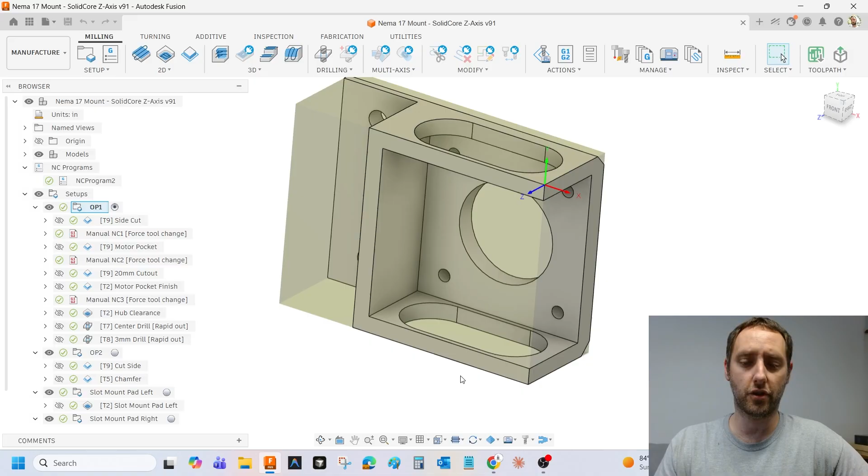Alright guys, today we are going to edit a Fusion 360 post processor for a Haas EC400 mill. We're going to use Claude AI to do the editing. If you haven't used Claude, just Google search Claude AI and sign in, sign up.

Okay, so before we get started, make sure you back up a copy of your post processor just in case. Make sure you test the code and just be cautious because we are editing your post processor and bad things can happen. So we're going to go to Google and search for Fusion 360 post processor training guide PDF.

Okay, now this first step is optional. You don't really have to do it, but I highly recommend it. What we're going to do is download the post processor training guide. So I open it up, it's a PDF. Make sure you search post processor training guide PDF. So open the PDF and hit download. Okay, so I'm going to download it.

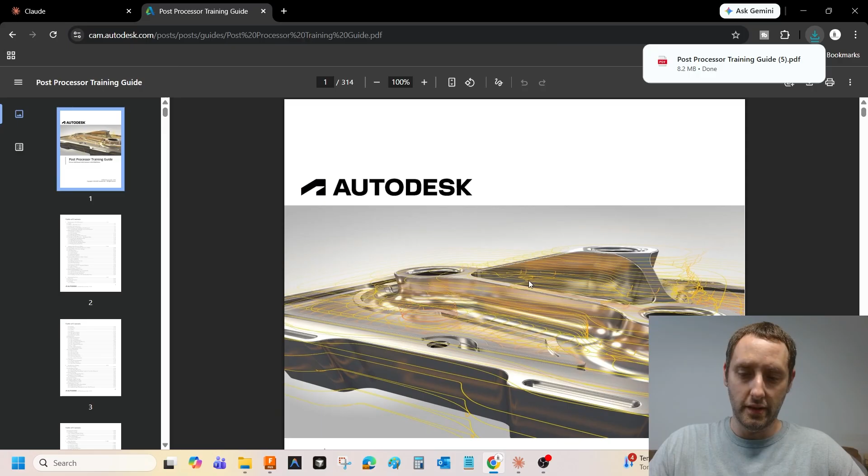Now what I'm going to do is go to Claude and hit this plus sign right here. I'm going to add the post processor training guide, and I'm going to add a copy of my post. Alright, so I'm going to go to add file. We're going to go to wherever you have your file, your post processor. If you don't know where to get your post processor, I'm going to show you.

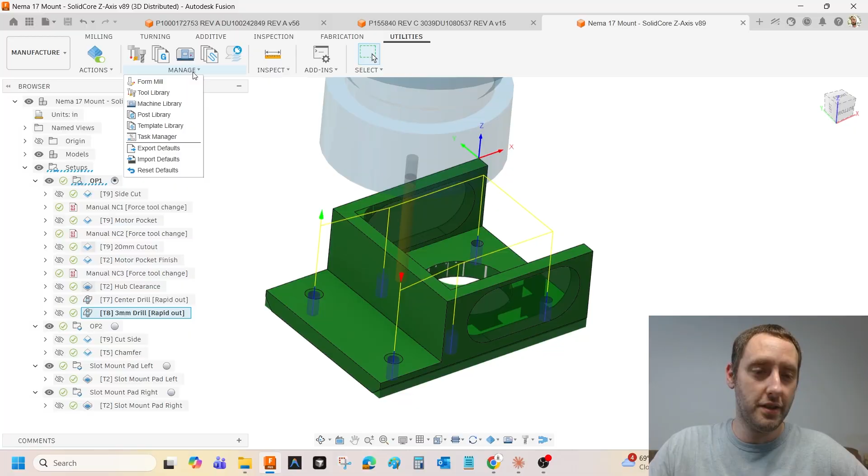I'm going to go to manage post library, then find the post processor. In this case, it's the Haas EC400. I'm going to right click, go to export, and save it in a location that I can find.

So now I'm going to go back to Claude. I'm going to hit the plus sign, then add the file. Let me hit open. So I added two files: the post processor training guide and the horizontal mill post.

Now what's going to happen is I'm going to prompt Claude. I'm going to tell it what we're doing, give it an intro: hey, we're going to edit this post, I need your help. Here's the post processor training guide, use this as reference, and here's my post processor. And then we're going to start listing things one by one that we're going to edit.

So the next thing you want to do is figure out what changes you want to make. Find a file that has some of the most common toolpaths you usually use. Doesn't have to be all of them. This is kind of simple right here, but it's enough to get us started.

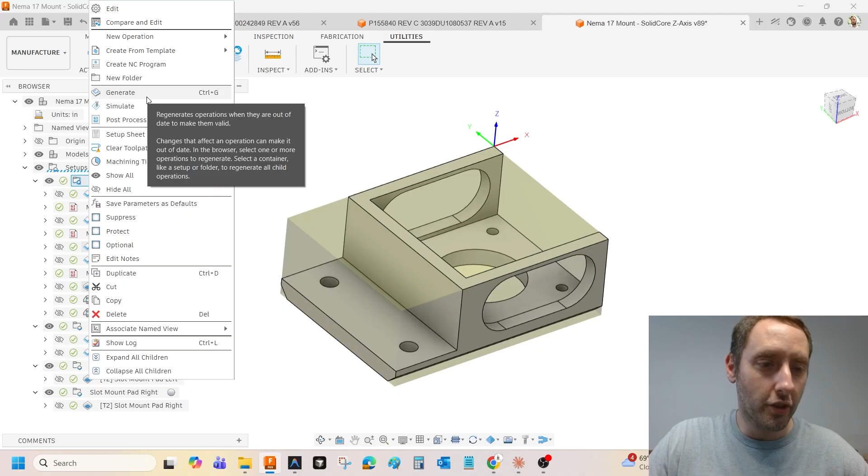So I'm going to go to post process, and I'm going to use the post that I just added. And let's go through here. So if you go through this, the first thing I want to do on this post processor is take out the using G00 travels along a dogleg path.

Alright, so I'm going to tell Claude, edit my post processor. First, let's start off with removing the using G00 which travels along dogleg. Alright, so I'm going to hit upload or send.

Okay, so Claude is reading. It says, I'll start by reading the skill for editing Fusion 360 post processor, then locate and remove the comment. Okay, so I told Claude, edit my post processor, first start with removing the G00 which travels along a dogleg comment. Claude responded, I'll start by reading the skill for editing Fusion 360 post processor, then I'll locate and remove the comment.

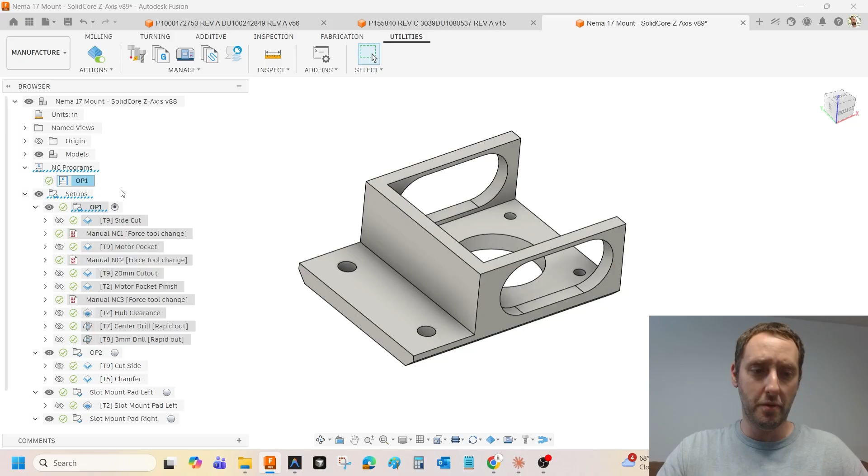So I'm going to go to my NC programs, and I'm going to hit edit. I'm going to go down to post, select post from library, and import the new rev. So I'm going to go over here to import, find it in the downloads right here. I got rev2. I'm going to hit open and select, right?

Now, one thing, I don't like to use sequence numbers, and I don't like the preload tool, so I'm going to go ahead and change some of the post properties. Another thing we could do, it depends on your post. Like I always select use G00, I deselect preload tool, and I like to go to format and turn off use sequence numbers, right?

So what we could do is we could tell Claude to make these default off, okay? By default, the post processor will have G00 and it will not use sequence numbers. Now the reason why I say that is I want to look at the code how I like it, right?

So I can see what changes I need to make. And if every time I make a change I have to re-upload the post and it comes in with those settings and I have to go change the settings, it's going to slow down the process because this is going to take a little while. We're going to have to one by one change all these things.

Now you can go and do all the steps at once, but I'm going to be honest, sometimes the AI kind of messes things up, and I found that it's just easier to check off one thing at a time on your list of different changes you need in the post processor. Okay, so you change one thing, you test it out, make sure it's working good, there's no bugs, because what will happen is you'll get bugs, especially if you start making multiple changes. Right now AI, it's okay, it has its flaws, but it's gonna have bugs. Okay, it's best to do one thing at a time.

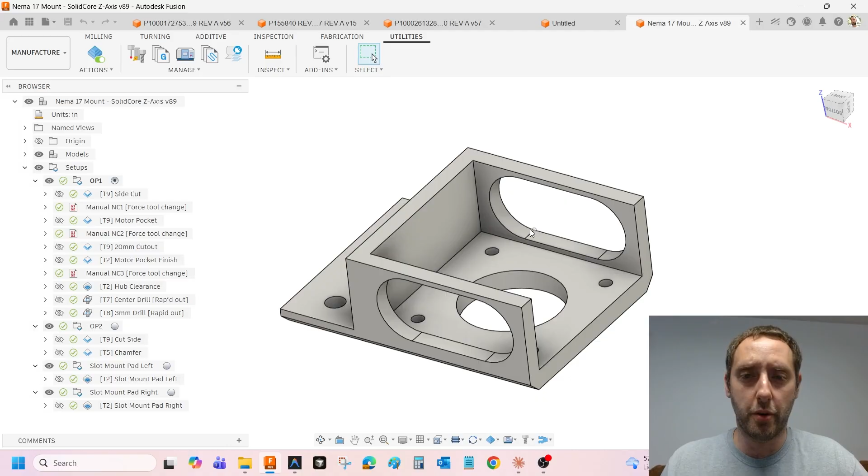Anyways, let's check out Rev 3. I'm going to click Rev 3, go download. Now we are going to test the post processor edit we just made. I'm going to right click, go to post process, select post from library. So we're at Rev 2, now we're going to be at Rev 3. I'm going to import from the downloads folder and hit select.

Notice that use sequence numbers is now by default no. So every time we re-upload this post, by default that property will already be off. Now what other changes do we want to make? For example, use G00, I want that checked every time - that is not going to be checked. And I also want preload tool unchecked. I don't like the preload tool. Let's go ahead and tell Claude to make preload tool off.

Make the preload tool off or unchecked by default. We may also want to explain that this is a post property. So next, make the preload tool off or unchecked by default in the post property.

All right, let's try that out. So it says it ran a command, viewed the file, found it - line 56, default value true, flipping to false. So it went to line 56 in the CPS file.

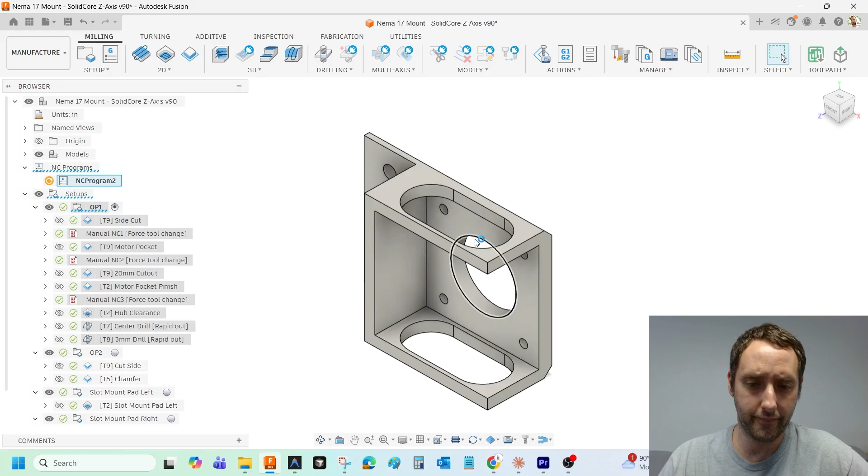So we're going to hit post, see what happens here. Hey, that was good, it's got the M01 right here. Let's check out the next toolpath - M01 right there, okay, so that's good. That looks right, I'm happy with that.

Let's check the last one. Okay, I got the M30. Sometimes when it starts moving the M01 around, it'll screw up the last toolpath where it has the M30, but it actually got it right, so we got that taken care of.

And let's go ahead and read what Claude said. So I had the flow wrong - the retract sequence between M9 and M5 doesn't happen in the right tool call. It happens at the top of the on section for the new operation, before the op comment.

So M01 emission to on section inserted right after the retract block closes the line 820, and right before we write in the comment, line 822. Sounds good, Rev 8 worked. Okay, so I'm going to tell Claude Rev 8 worked - remember this for next time.

What it's going to do, each time you say remember this, it's going to save it to its memory, as you can see, managing memory. Because we're going to have other post processors to edit, and basically what we want to do is build a skill.

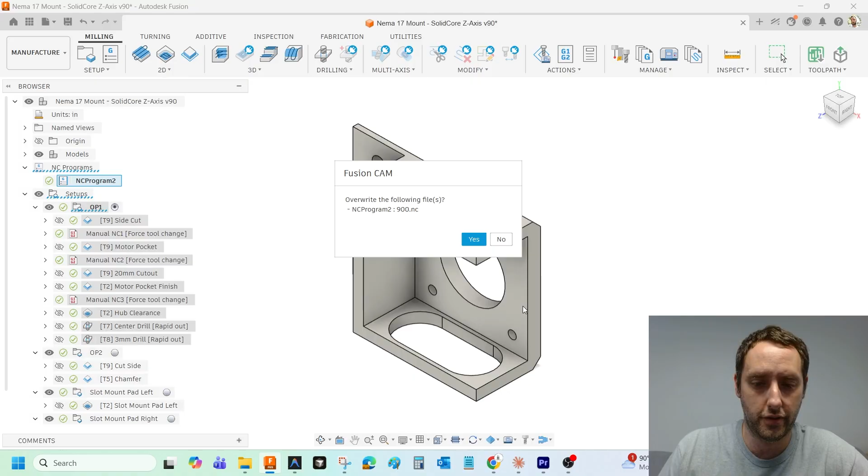Alright, so let's go ahead and try this out. So we're going to click on Rev 9, let's go download. Okay, so let's test the post out. I'm right click, go to edit, I already have it imported in. Rev 9, select post, hit yes, overwrite it.

And that looks correct - it got the center drill diameter. That's fine, we're just going to leave it at that. Okay, let's go ahead and tell Claude that worked.

Remember this for next time.

I like doing that because one thing I've done before that worked out pretty good: after I got a post processor written the way I wanted it and proved out, I told Claude to write me a book, a PDF file, describing all the changes it made. It documented it, and it was like a 90-page document, quite large. It used up a lot of tokens. If I do that again, I'll probably tell it to write a PDF but keep it under 20 pages, just a summary, because it was quite detailed.

Okay, so let's go ahead and look for the next change. The next thing I want is for each toolpath operation to have the tool number and tool call-out underneath the name of the operation comment. For example, tool 9 right here is the 5/8 end mill.

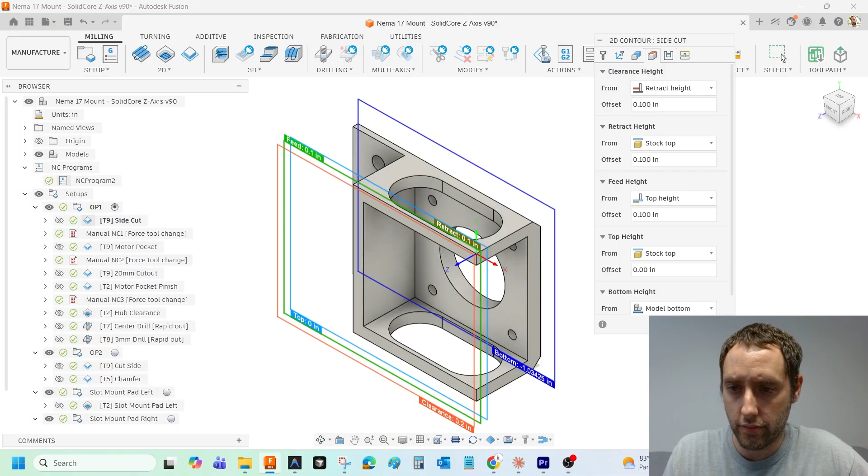Now, just to make sure Claude knows where to put it, I'm also going to post process as a dump file. I have a dump file—there we go, Dumper. So we'll just copy all of that and give it to Claude. Here's the dump file for more information.

So if you ever can't get the right information to Claude, or you're ever not sure, give it a dump file. A dump file is basically the intermediate file between the raw CAD/CAM data before it goes to the post processor.

Got it. Two changes: move M08 from before the G00 Z.1 to after it, and add a block delete prefix to M08 so it becomes block delete M08. Let me find where the coolant M08 is emitted relative to the Z feed move. Let me look at line 883. That's the set coolant, tool.coolant, call inside on section, which is where the M08 is emitted at the start of the toolpath.

Okay, it says now I see the flow, looking at the screenshot output. Okay. All right, I think it has it. Let's test it out here.

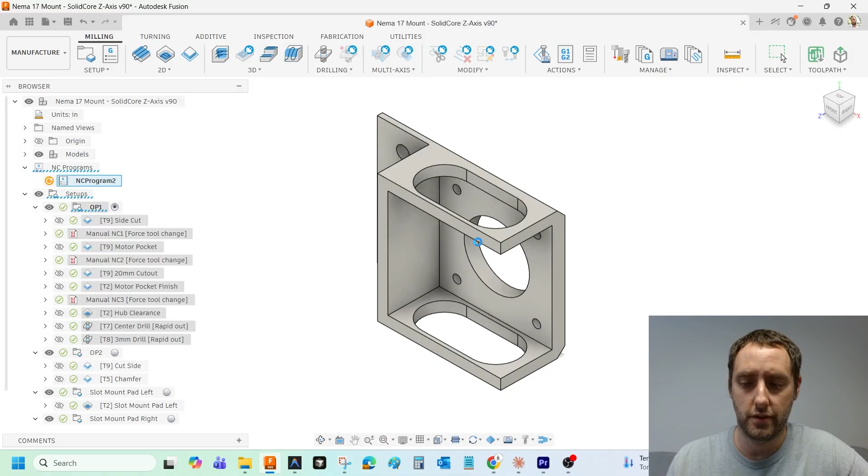All right, let's get the new Rev 12. Let's check out Rev 12. We're gonna download it, edit, go to import. Got Rev 12, I'm gonna have to go clean up my list here. Alright, let's get post, hit yes. Alright, let's check this out.

That looks good, besides it's before the Z.1. We want it after. Let's check this out. Same thing right there. Okay, we're closer. I mean, that's not where I want it, but that's definitely closer. Okay.

So let's show Claude how the code came out. Now notice I'm not even going to tell Claude -- I'll just take a screenshot and give it to it. It can problem solve, it'll figure it out.

Look at the screenshot, the slash is now flush with the M8, so that's correct -- no space. But the M8 is landing between the G43, the Z.2 height offset, and the G00 Z.1, not after the G00 Z.1 like the original request. Okay, so it does the problem solving.

So the right initial positioning is only writing items 1 and 2. Item 4, which is G00 Z.1, is the first rapid of the actual toolpath on rapid from line 651 in your dump. Okay.

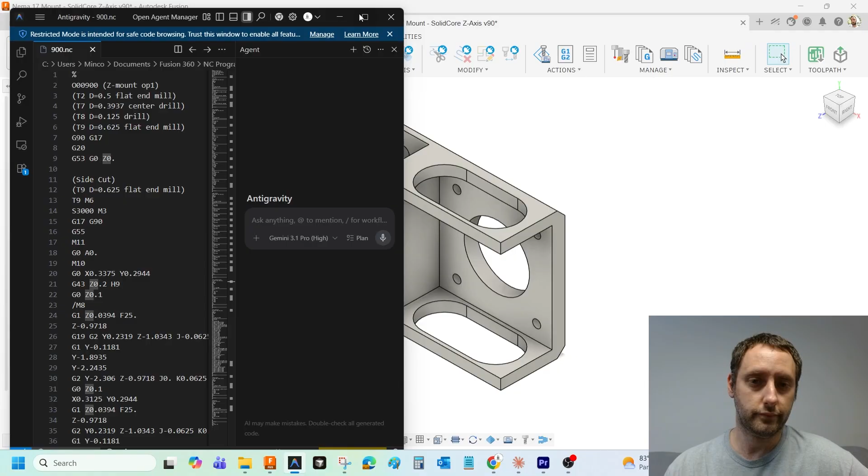This may take a few tries too, but it's just part of the process. Okay, so close this out. Let's go to edit, let's re-import the new Rev 13. Select, post.

Alright, hey, that's right. Let's check the other toolpaths. That looks right. That looks right. I think we're good. Let's check the drilling operation. That's correct.

Alright, so that's about it on this post-processor edit. You may make a few changes later -- some of this stuff can be changed in the settings, so it's not really a post issue. We could change it in the post, but it'd be more reasonable to change it in the actual software. But everything looks good, I think we'll call this one done for now. See y'all next time.